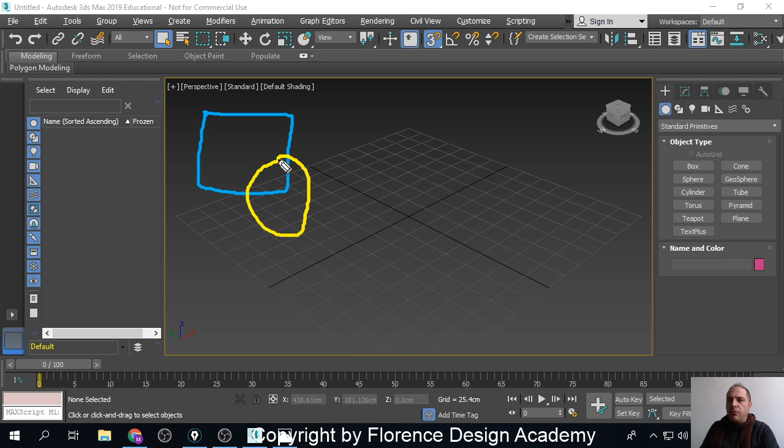And this is intersection. Last but not least, in ProBoolean there is an operation called union. What union means is simply that my solid objects will be combined together like one unique object. So if I start from here, and if I have these... whoa, what a terrible drawing.

So, wait a second. Hello, Marcos. Some of us just started filming, can you please tell what you're working on? First of all, you are late, so there is not my fault. Some are still waiting, and why? I mean, I started streaming a while ago. But what we're viewing today will be, we will see ProBoolean, that is a way to combine solids together.

Then I was saying these, we can make operations, and we've seen subtraction, and there is an operation called union that basically combines objects together.

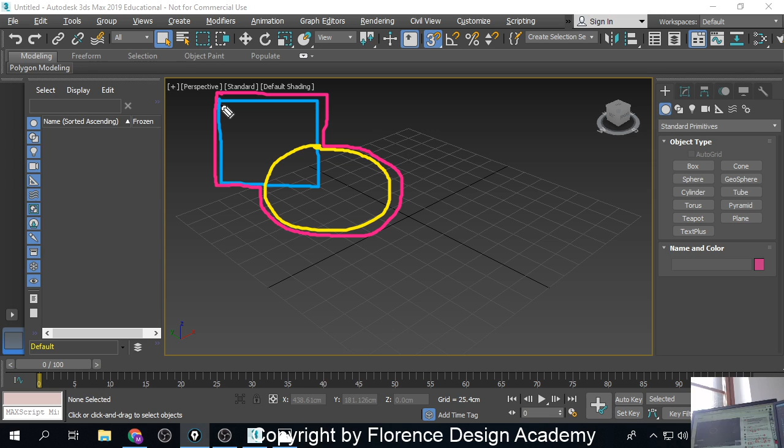Wait. No, we have been sitting in front of the computer for 30 minutes. Just showed up, come on, I don't believe you at all. You know also why? Because while I'm doing the stream, I also have another screen. Nah, he didn't show the link. Nah, come on, I don't trust you. Look, and the reason why I don't trust you, let's see if we can make these in real time, is that I have two monitors, one that shows the actual lesson, and one that shows the stream, so I know when I am online and when I'm not. Let's see if I'm back to the right setting.

Perfect, beautiful. Anyway, we haven't started yet, I was just doing an introduction. We have to see...

ProBoolean. So let's start with 3ds Max now. First of all, ProBoolean is a compound object, so we will find it in the compound objects menu.

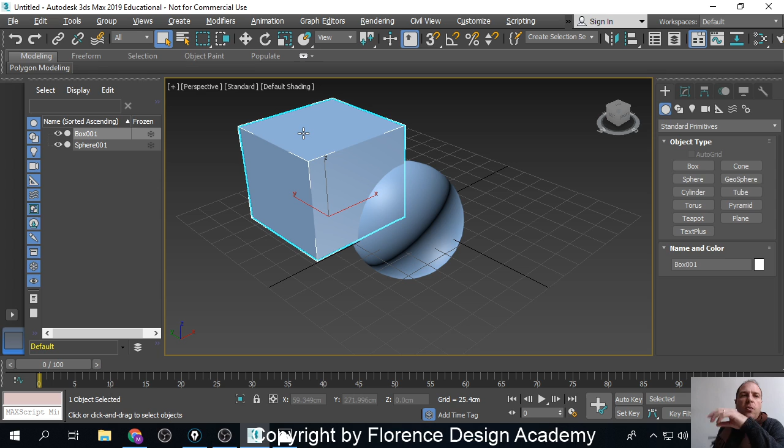So let's start with easy examples. If I create these two objects, what I have to do is set, for me, which is object number 1, and by doing this I will simply select it. With one selected object, I will go to the compound object menu. So I go to create, geometries, then the menu where I find standard primitives, and then I click compound objects.

If I have only one solid selected, I will see a button called ProBoolean. Take care, it is ProBoolean, forget about this one. I click ProBoolean, and inside I need to use a few starting options. By scrolling my menu a little, I see 3 main operations: union, intersection, or subtraction. Subtraction is selected by default whenever you start using 3ds Max, and I will use subtraction at the beginning.

When I want to tell 3ds Max which solid to subtract, I click Start Picking, and then I pick the sphere. When I click onto the sphere, what happens is that I've made my first subtraction. And if I change my point of view, I will notice that I have really removed the volume of the sphere from the volume of the box. This is subtraction.

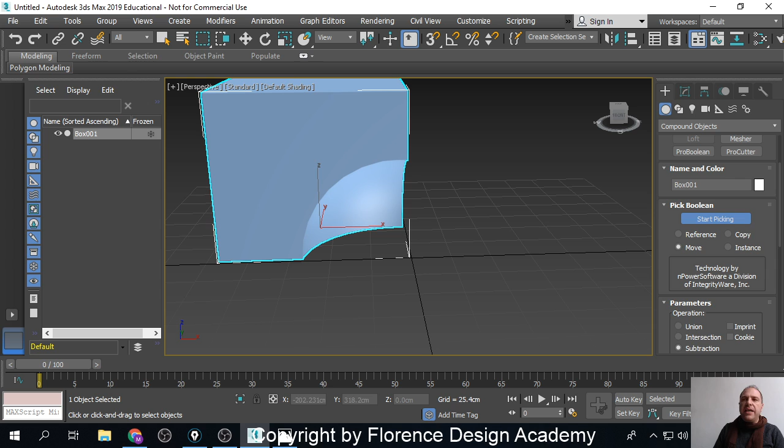Subtraction can be done not only between 2 elements, but if I create more starting elements, I will be able to select my starting object and start removing more elements. Why do you have to know this? Because if you correctly look at the ProBoolean menu, you will see that the Start Picking button is still highlighted in blue. It is active because technically you can select a lot more objects. To show this feature, I will create more objects at the beginning, and let's see what happens.

Look, for example, I will make a weird random example first. Then, using this option where we can subtract more than one element, I will show more realistic examples. But let's start from something random. I make a box, I make more elements, but they are all 3-dimensional elements, stuff like these. It's okay.

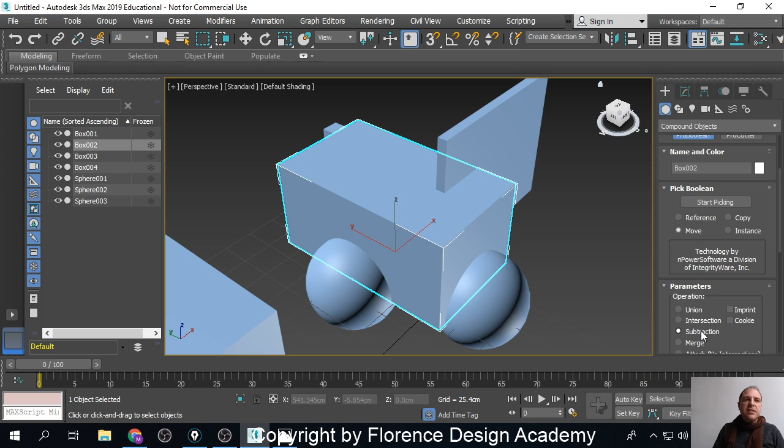So I select that for me this is object number 1, and I want to remove all other solids from this particular one. So what I do is select this box only, then click compound objects, then ProBoolean, scroll down the menu a little, check that the option is correctly set as subtraction, and then I click Start Picking.

Now, one by one, I will click on those solids that I want to remove from the box. So I pick this sphere, I pick this one, then I pick this, and then I keep picking, and then these, and I am basically sculpting my box by removing those shapes that I have created.

I will make other examples, but most important is that when I am done, I need to remember to close the button called Start Picking. If not, 3ds Max will always be in picking elements mode, and I can't even select them all at one time. I have to pick because, more or less at the end of this lesson, I will show you a very complex example. But 3ds Max keeps track of the list of objects we select, and it also keeps track of the order we used in selecting them.

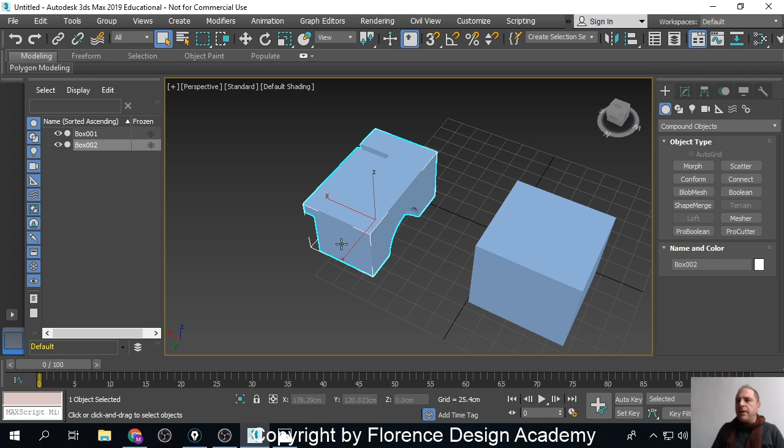That is extremely important. But let's make a few more examples. Example number 1 will be, look, I will make a box.

What happens is one of the surfaces is hollow, it simply doesn't work. It won't correctly make the operation. And we can try, but look, if I make a box that is correct, and by mistake I have these, look, so if I extrude a shape like so, this is something that is wrong, that is hollow, and this is hollow because some of my vertices and edges are overlapping each other.

If I select the box and I go to compound, pro-boolean, subtraction, start picking, and I pick these, this is what happens. It is just wrong, okay?

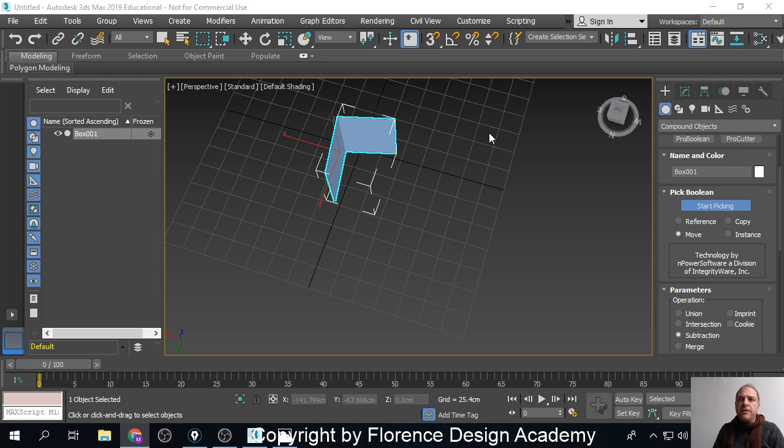Let me check one second. Exactly, no, because for a second the connection was lost. So this is what happens, just wrong, it doesn't work. So they must always be solid objects, and they must be correctly solid objects, correctly done.

So what I was saying is this. Let's see this first simple example. That is, I make a box, then I will do a very basic operation. That is, I use this box, I use rotate, and I make a clone of this object by doing shift and rotating it 90 degrees. And till here, let me tell you, nothing complex, nothing that interesting.

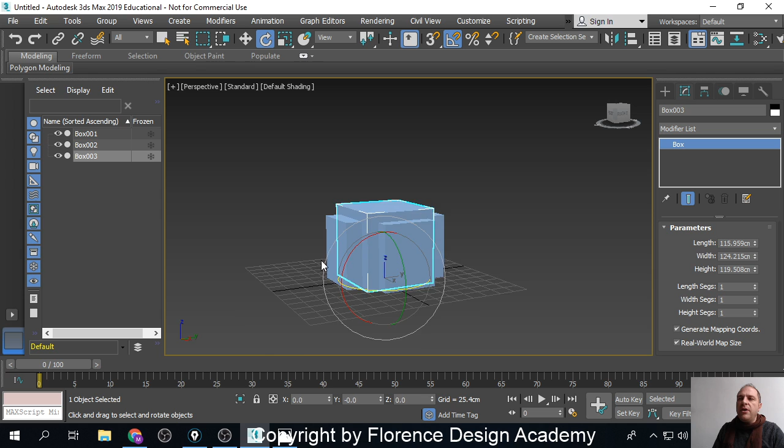What I will do instead now is, I make another box, and I will place this box so that it is a little bit narrower than my other boxes, but it will be a little bit taller than the two boxes that I have created before.

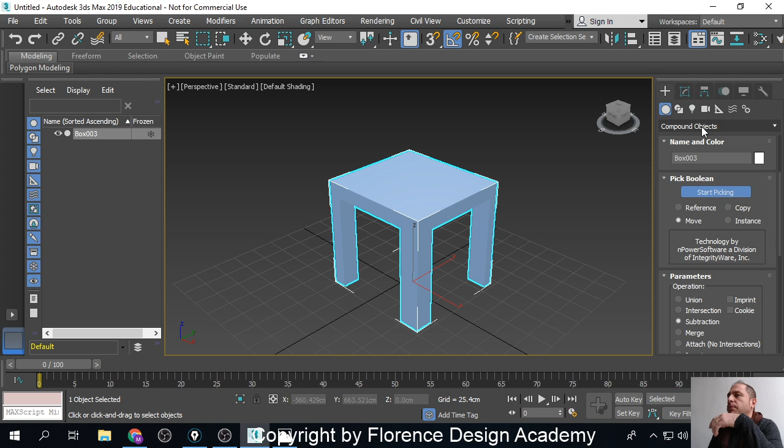Let me show you example number two, just to show you that you can make more than one subtraction. Look, I will make this box and move it a little bit up. But then I will shift and move these up, and I will make, let's say, 3 clones.

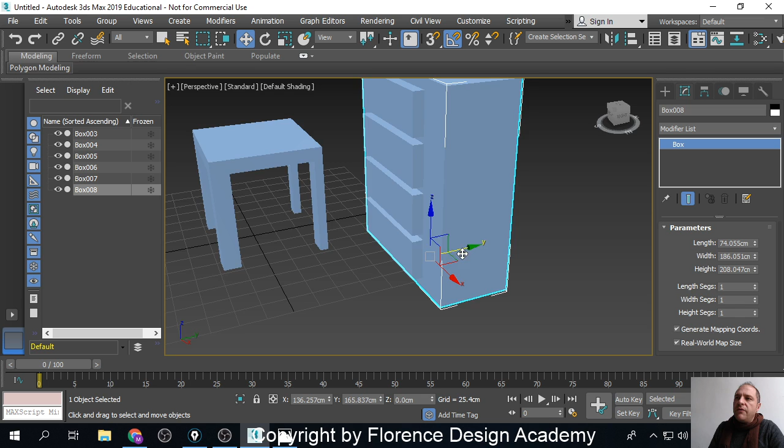Last but not least, I make another box. That will be a little bit larger, but it will be, oops, not down here, it has to go up. So it will be like this. Exactly. And I will move it so that I can see these boxes, and I will adjust it, I will make it narrower.

Perfect. So what I have now is this box, and these 4 boxes that are not, this time, passing all the way through. So what I do is select the bigger box, go to create geometry, compound, ProBoolean, start picking, because I'm using subtraction, and I will subtract 1, 2, 3, 4. I close start picking, and I have made a beautiful bookshelf inside my project.

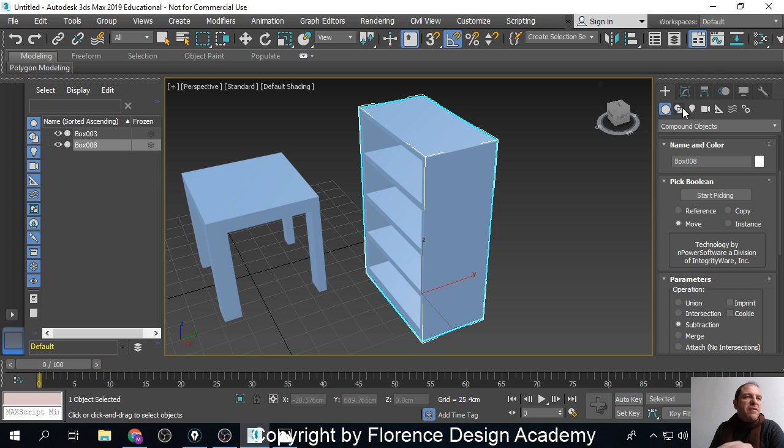But to show you one more example, I want to show you that you are not limited in using only solid objects like boxes, spheres, and so on. Whatever is a closed solid, look.

I will now make a line, and I will be sure that when I close it, this is not only a closed shape, but I have no self-intersecting edges. Everything correctly works. I will try by selecting this shape and extrude it. So let's see, I click extrude, and this works. You can see that the top of my shape is capped, so the solid is a correct solid. I will just make it taller to look like a realistic wall.

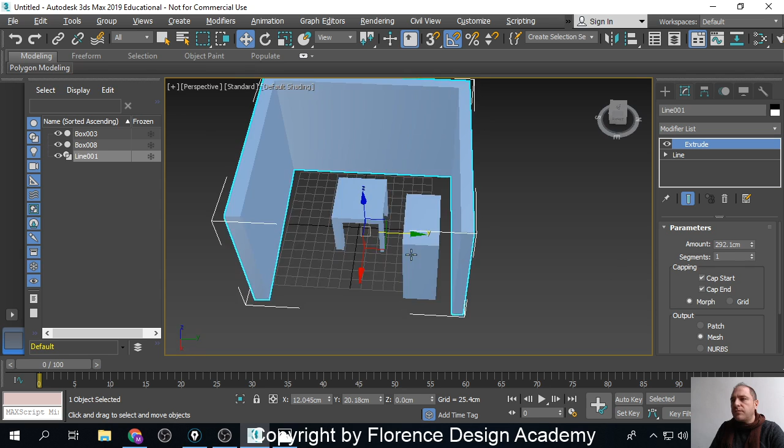Okay? And then, because I don't want just to use a box, that would be too easy, I will do this. Look, I click another line, and I will draw this particular shape. That is line, line, line, line. And then I click line, then I make it angled. Then I move my mouse here, then there. It's not super symmetrical, but it's good enough.

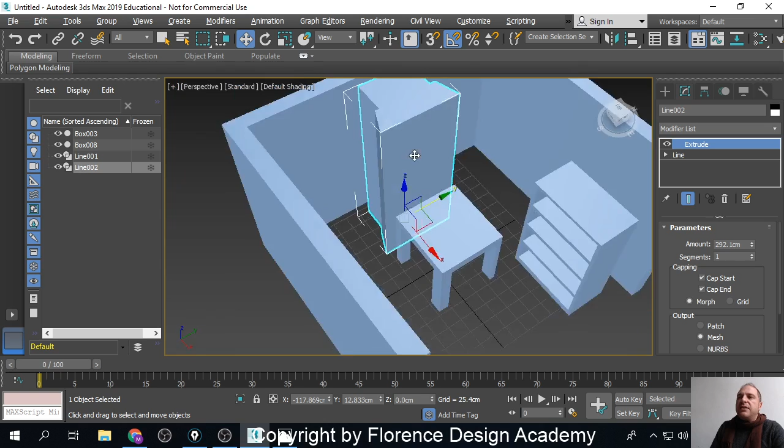What I will do with this line, I will select extrude, so that I turn these into a solid. But I won't extrude it as much as I have extruded the wall. So I will select the amount and make it less. Then I move this object so that it goes through the wall, and I will also move it up a little bit.

What I do now is very simple. I select that the object that I want to keep in my scene is the wall, so I will select this as object number 1. Then I go to create, geometry, compound, ProBoolean. I check that my operation is subtraction. I click start picking, and I pick the solid, that weird solid that I've created before, this one.

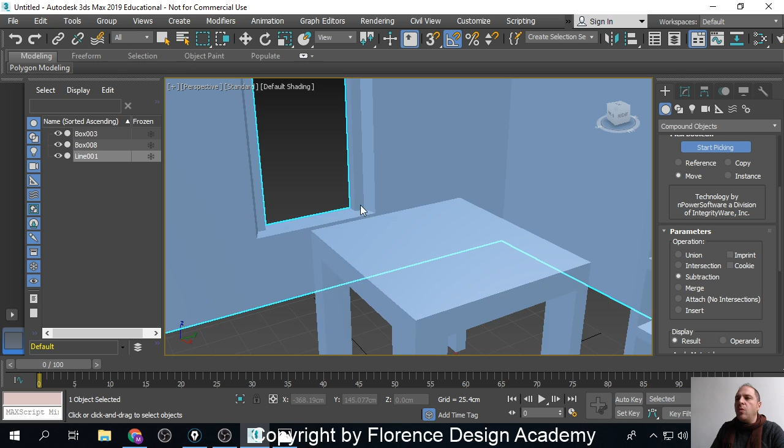Poof! And this is how that solid will cut my phenomenal wall. And you have seen that in this way I have made a window, a realistic window that is not just a square hole passing through the wall, but I also have these small parts of the wall that are slightly angled, and this part is flat, and I have perfectly created the hole for my window.

So that we can see that we can really make a complex combination of surfaces, solid, in order to use ProBoolean. But believe it or not, we are only using subtraction. That is one of the three operations that I want to show you. I want to show you also intersections, and I want to show you union. So let's see these other examples.

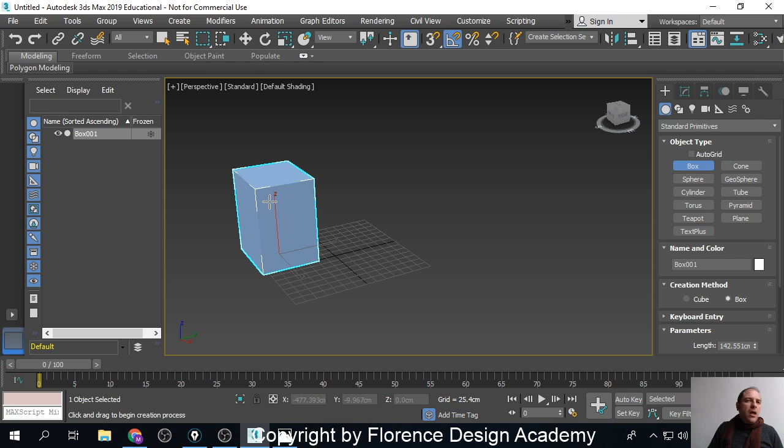So let's delete this masterpiece, and let's see intersection. What is intersection? Let me create this. I make a box, and let's create something different than before. Let's make a, I don't know, a cone. So I make this cone here, and you may notice that the box and the cone have a certain volume in common. So you can notice that the box goes inside the cone, the cone goes inside the box.

What does intersection mean? Intersection works like this. You select again one object only. You go to create, compound, ProBoolean, and before clicking start picking, take care because this is crucial. If we need to change our operation, it must be changed when the start picking button is gray. So I will first click intersection, and then I click the button that is called start picking.

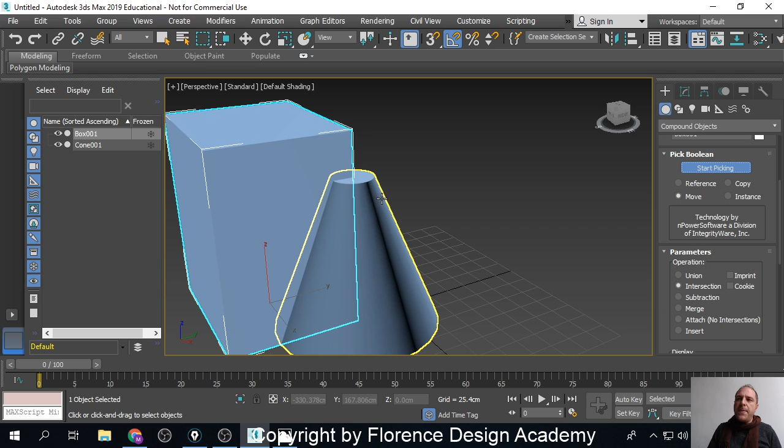With this now, if I click my cone, intersection will do this. 1, 2, 3, boom! This is an intersection. That is basically an operation that is extremely different than subtraction, because instead of removing volume from one object, it keeps only the volume that at the same time was in common between two elements.

This operation here is not that used, is not that common in general, but it is crucial in certain situations. I will show you examples, but the main reason why you should use intersection is if you need to create pieces that you want to join together.

Because see this example, that would be fantastic. This would be too cool to be true. But look, if I make this operation here, look, I start by creating solid objects, and I place my solid objects so that I'm going to make a subtraction. Take care.

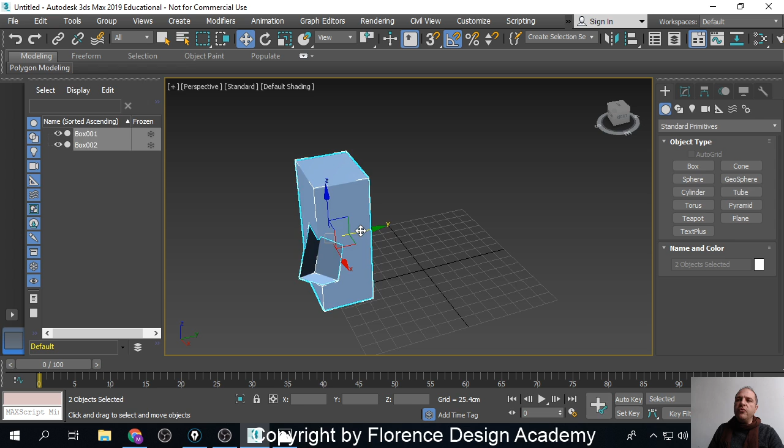Before using ProBoolean in between these two boxes, look what I do. I select both boxes and I use Shift and Move to make a copy of my selection. So, I've made copies so that I can work with them independently without having any issue. So look what I have now. I have these two perfectly similar sets of boxes.

Look what I do now, because this would be shocking. I select one of them, I go to Create, Compound, ProBoolean, and for example, I keep these as intersection. I click Start Picking and I pick this box. This weird thing that remains, believe it or not, is the volume that at the same time is inside my taller box and inside the angled one.

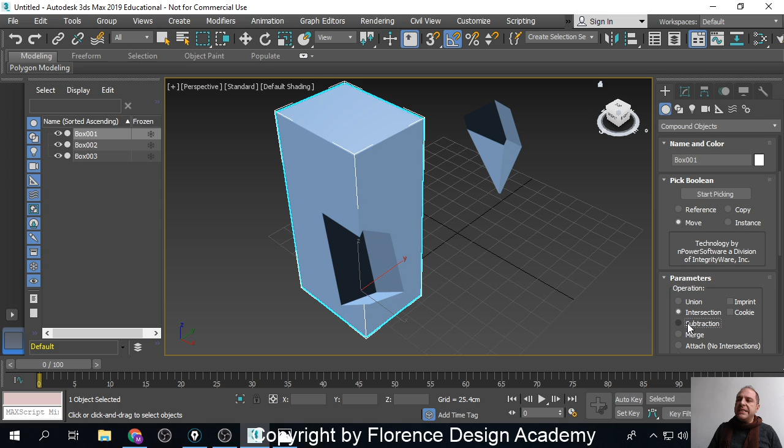What I will do here, in my second set of solids, is select the box, go to Compound, ProBoolean, and before clicking Start Picking, I make a subtraction. I click Start Picking now and I pick this. So I create, and then I close it, and I create the hole inside the box.

So what is the link between subtraction and intersection? The link is that in this way, by using two twin sets of objects, one with intersection, one with subtraction, believe it or not, I have made a piece, this fragment, let's say, that will perfectly match this hole like this. It matches so well that it becomes even hard to be seen.

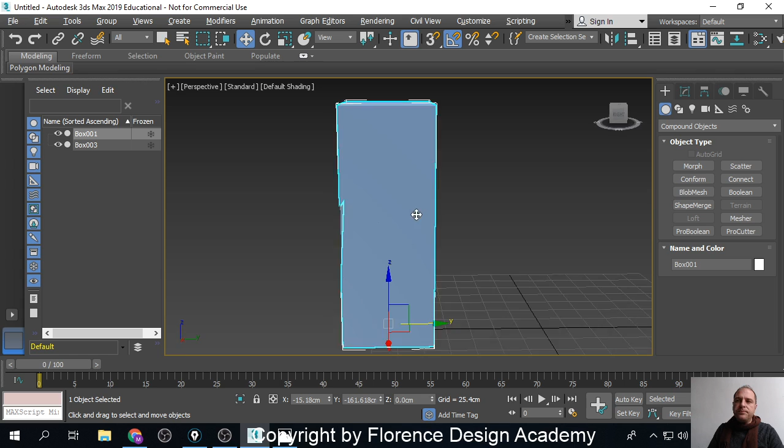Don't mind it, even if I haven't explained it, I just changed the color to see it better. But look, now we have this piece that matches this gap. Fantastic.

Let me show you now union. This is the last operation that you need to know. Union is pretty similar to group, but union as ProBoolean is a geometric operation. Why did I say the word group? Because it is very important: ProBoolean works with solid objects. It doesn't work with anything else, and a group for 3ds Max is another object. So if you have a group of elements, ProBoolean won't work with them.

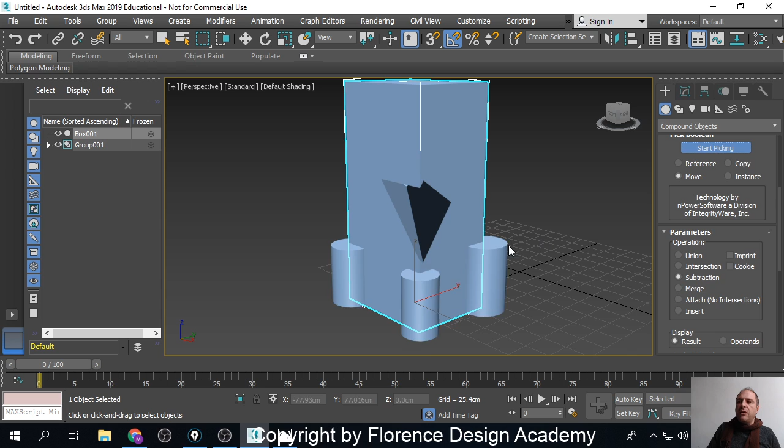So look, let's say you have these cylinders, and you select your cylinders, but you group them before. If you select this, make a ProBoolean, subtraction, start picking, and select these, they will work when you subtract them, and this works only because it was a group of 3 solids. But it won't work if you select the group first and then want to cut something from the group, unfortunately. So sometimes we need to pay attention.

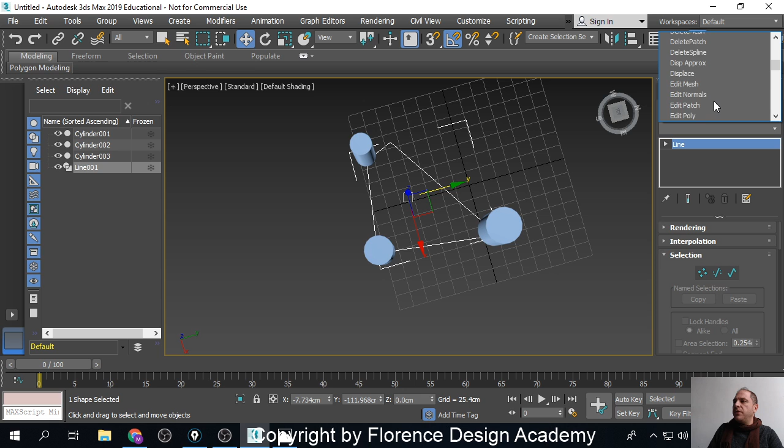For this reason, inside ProBoolean there is another operation called union. So if we want to do the opposite, imagine we want to have those 3 cylinders, and let's say make a line like this. Exactly. And I extrude this line. Where is extrude? Here. Perfect. If I want to keep my cylinders, but cut them so that inside they will have these angled missing parts, I have to do union before.

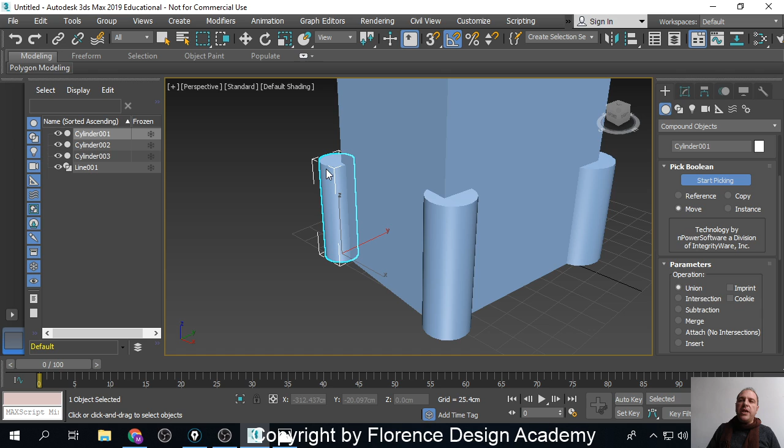That works like this. Again, I select one object, and look also at what happens inside my Scene Explorer when I make union. By selecting one object, I go to Compound, ProBoolean, I change the operation before. So first I click union, then I click Start Picking, and I make a union between this cylinder and this one. In this way, they are attached together, so they become one object,

not like a group. Making a union, do you remember in editable splines we've seen attach? Exactly. This is like attaching splines and not grouping them together. So now they have become one solid only. And you can also notice that my two additional cylinders are gone from my menu because they have been fused together with the first selection.

But now, if I want to make a subtraction, I simply close Start Picking, because I need to change the operation. So I close Start Picking, I change the operation to subtraction, and then I click Start Picking again and I pick the box or whatever it is, and boom! Because I have joined these cylinders first and then removed that shape, my shape is removed from all three cylinders together. Okay?

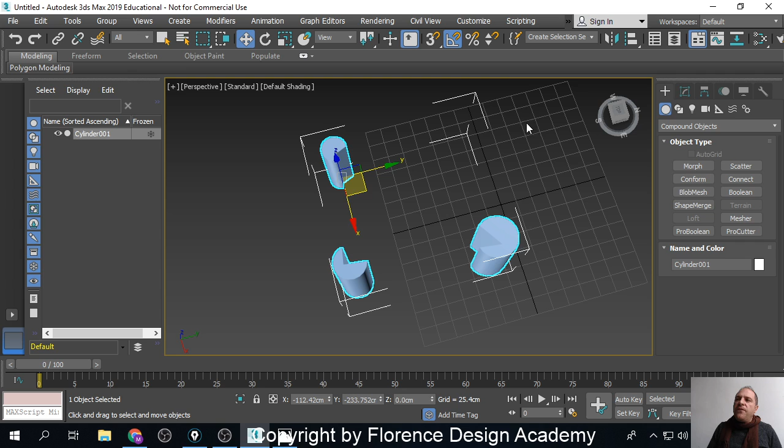So let's move on. I want to show you that inside the same ProBoolean you can combine more than one operation. And you are not forced to create all of your solid objects from the beginning. If you want, you can make a few objects, then ProBoolean, then create other objects, then ProBoolean, and so on.

This happens simply by selecting your ProBoolean object and going into the Modify tab after your ProBoolean has been created. First, I will show you a random selection of objects. But using the same exact technique, I will show you that you can create more realistic objects by combining more than one operation. So let me show you example number one, the random one.

Look, I can start by making this box, maybe. Then I will make a bunch of other boxes. Perfect. Then I make cylinders, one here, one there, one here, and I will rotate these so that they intersect all my boxes.

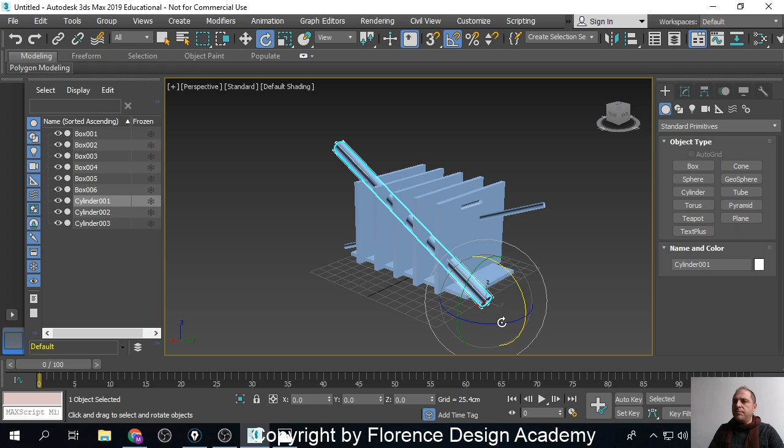Like these, like that. I mean, this I don't like. And then this one. Okay. So what I have to do now is this. I want to make join first. Then I will make subtract. But then I will do another shape, and then I will do intersection.

So, look here. I select one starting box. I go to create, compound, ProBoolean. Then I click start picking. Sorry. Then I check that I want to make union first. This is extremely important. Then I click start picking and I pick these, then these, then these, and that. So all my boxes have been joined together and now they act like one solid only.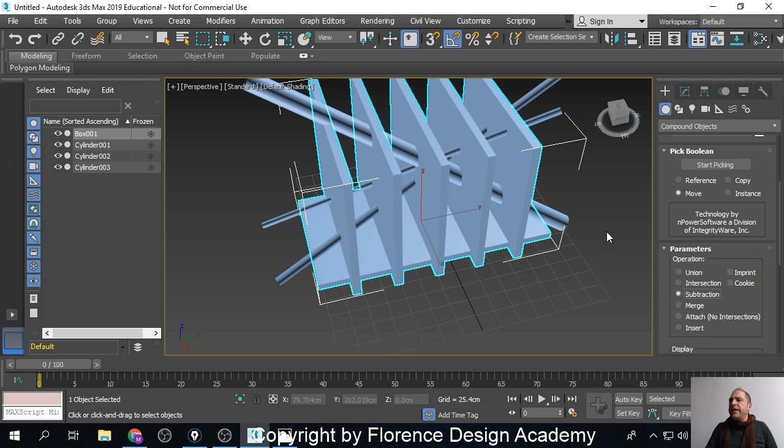But now, see this, how can I change my operation? In order to change the operation to subtraction and to be effectively working, what I have to do is, I have to turn off start picking. This is extremely important. Then I click subtraction. And then I click start picking again.

With my subtraction and my start picking button selected, I will pick these cylinders. And because I have already joined all my boxes before, by removing those cylinders, I remove cylinders from all of my joined boxes.

What I want to do now? Now I want to do an intersection, but there is nothing that I can intersect right now, so I have to add one more shape. So I will create whatever shape. Let me just make a sphere. Yes, like these. And I will move the sphere up. I will scale it a little bit also. Okay?

And what I will do now will be this. Look, I select what is already a ProBoolean because this object has been already created with ProBoolean. So I select it. I go into the Modify tab and I can see that this is still a ProBoolean. So now the only thing that I do is I change the operation to intersection.

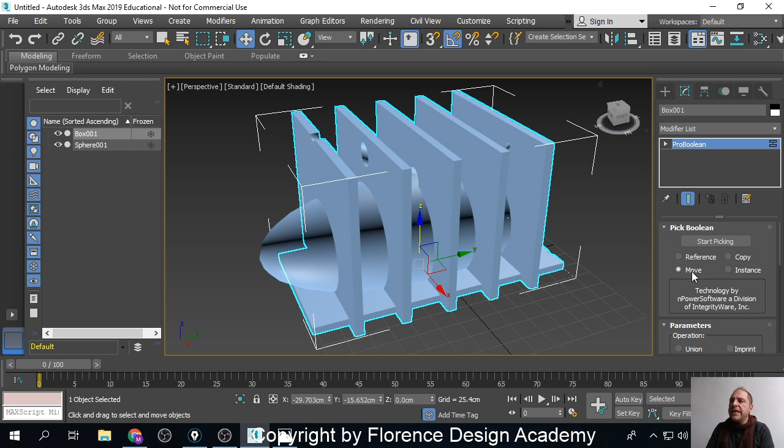I click start picking and I pick the sphere. So what remains will be only the volume that at the same time is inside the sphere and inside my ProBoolean. So it will remain this. Fantastic, isn't it?

Now, let me see if I can show you a realistic piece of furniture, there is actually something that you can easily model with this technique. I just need to remember the name of this object. Give me 3 seconds.

What you have to do is only you make one starting box. Then you shift and move it. We can make several instances. They are too thin, in my opinion. Exactly. Let's make them thicker. You make several instances. Then you select them all.

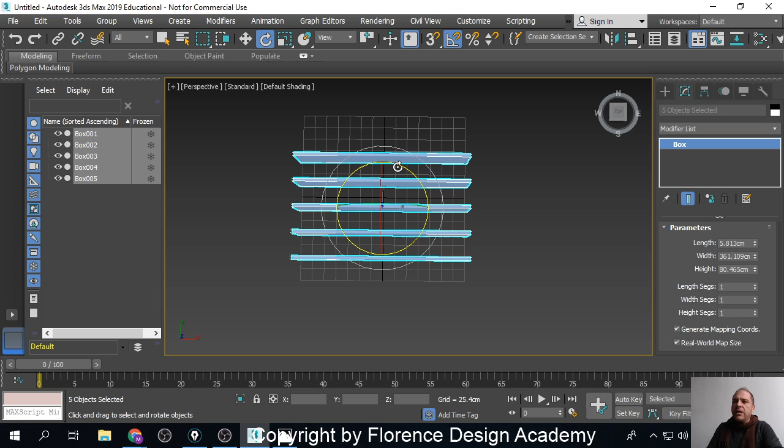You click rotate, and what you have to do is you shift and rotate them together 90 degrees. So I'm also using angle snap. You left click, but you are also pressing shift, so you shift and rotate, and you make these duplicates. Okay? Check this, because this would be unbelievable.

What you have to do now is you have to first, using all those boxes, use union. So I select one of them, and just because I'm picky, I select the center one. I click compound, ProBoolean, union, and you have to change the operation before clicking start picking. Now I click it, and I will pick all other boxes. And then I close start picking.

In this way, what I obtain is that this acts like one solid object. And you can also notice that even in my Scene Explorer here, all other boxes are gone because they have been fused together in this single object.

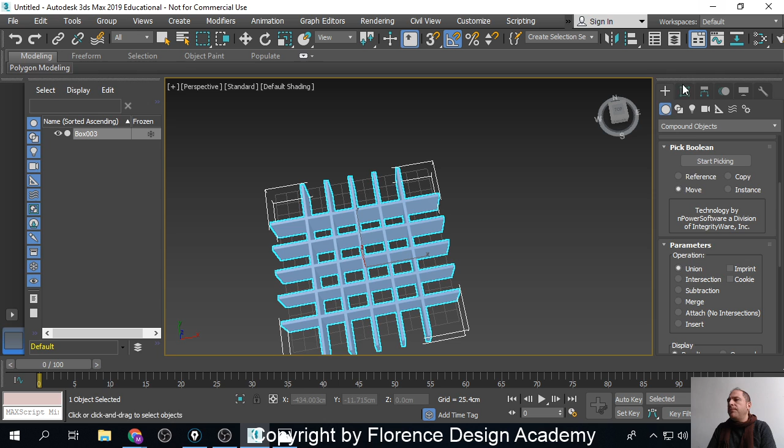I have almost done. What I will do is I make a sphere. But I want to be at least a little bit more precise. I would like to place the sphere into the center of this box. And you may notice that by selecting the center box as starting object, the pivot of my ProBoolean is also in the center.

So I use snap to the pivot and snap to the pivot only, and I move the sphere from its pivot to the pivot of the box, of this object.

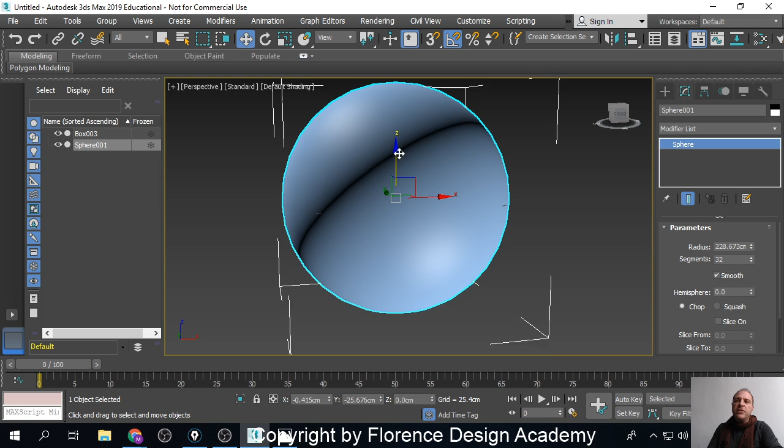Okay? Ready for this? Look, I change the radius of the sphere, but I also, without any snap, I just move the sphere down so that it is still into the center, but has been moved below on its vertical axis, and maybe I can make it bigger, exactly like that.

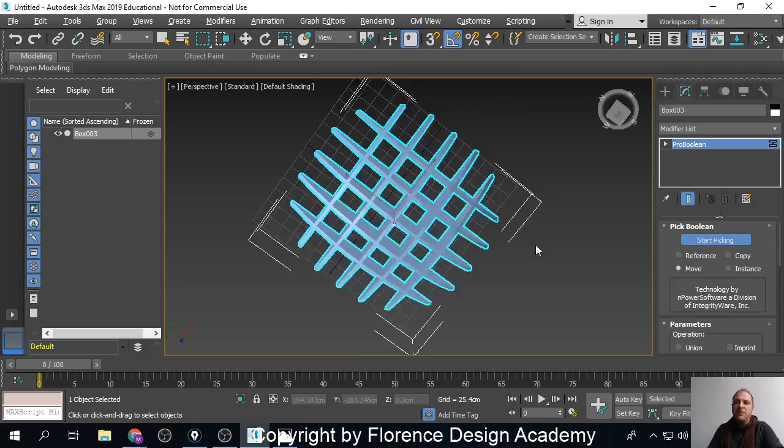Ready for this? If I use now the ProBoolean, but this time I use intersection, so I go to the Modify tab, I change first operation to intersection, I click Start Picking, and I pick the sphere, and what remains will be this. Ready, steady, go. Boom! Fantastic. Look at that. Unbelievable, isn't it? I know.

And by using very simple steps, you have created that particular shape that we were trying to do. There is this bookshelf here. Okay? If we add also a box behind, that will be like a circular shape. Or we can add it as a cylinder, that would be exactly the same.

By combining shapes, I want to make a last example that is again even more complex than this, but it shows you that in 3ds Max we are not limited to making boxes, spheres, cones and stuff like this. We can really create extremely complex objects, and we are just scratching the surface. So again, let me see if I find something that I can use as a reference. I need a picture.

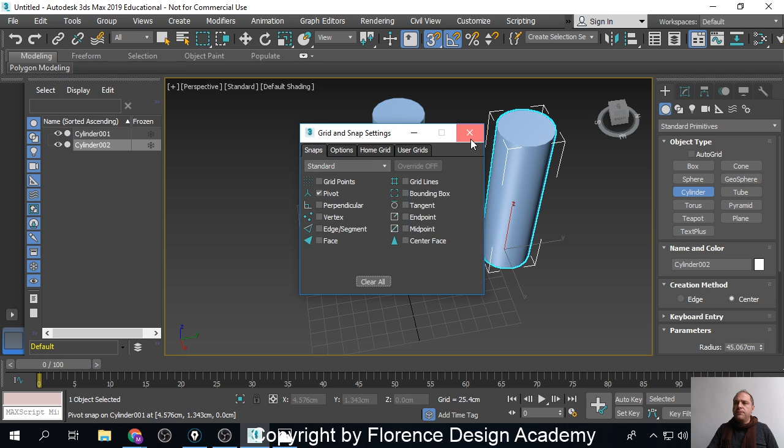Then I move cylinder number 2 from its pivot into cylinder number 1. Oops, sorry. Like this. In this way, my two cylinders are perfectly aligned. They are concentric, to be more precise. And what I will do next is I will turn off the snap, and I will simply move this cylinder a little bit up, like this.

Not done yet. What I have to do is I have to select both elements, and I will rotate these two elements together. I rotate them so that they will be horizontal. So I rotate them 90 degrees. And again, till here, nothing that is out of this planet.

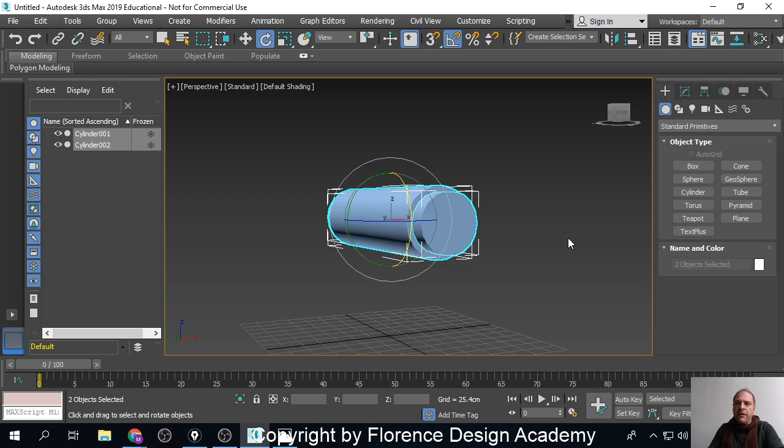But what I will do now is I will select again both cylinders, and I shift and rotate 90 degrees, so that in this way I obtain the shape of 4 crossing cylinders. Okay? Believe it or not, we are almost done. We need to fix a couple of things.

I now have to use ProBoolean, and I will start by selecting this cylinder, that is one of the two outer cylinders. What I will do is I will simply click Compound, ProBoolean. I check the operation, that must be union first. So I click Start Picking, and I join this outer cylinder with this second outer cylinder, like this. Okay?

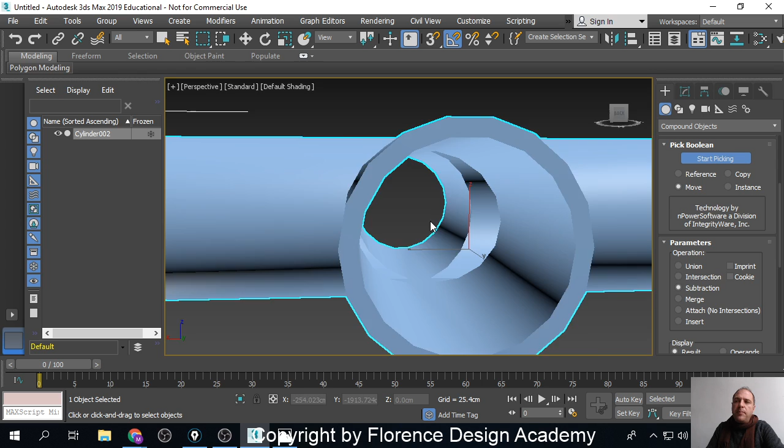Then I have to click Start Picking because I have to close it. And this is why: because now I need to make subtraction. So I close Start Picking, I click subtraction, I click again Start Picking, so that I subtract this longer cylinder and this longer cylinder. And what I get right now will be this. It will be basically like a pipe that is cut inside. Okay?

Now, Michelle, it is possible to make this with tubes. If you make tubes, and I will show you after this example, believe it or not, you must follow a completely different path. Because if you make tubes at the beginning, what happens? If you make these as tubes, when you remove one of these cylinders, it won't cut all the way through the two tubes together. So you can use tubes, but I will show you by following a completely different path. So just stay with me one second.

But look, the last step that I have to do here is I need to make a box, and I need to place this box where I want the vault to be. So let's say I will move it here. Okay? I can then, if I want, make the box smaller or bigger, doesn't matter.

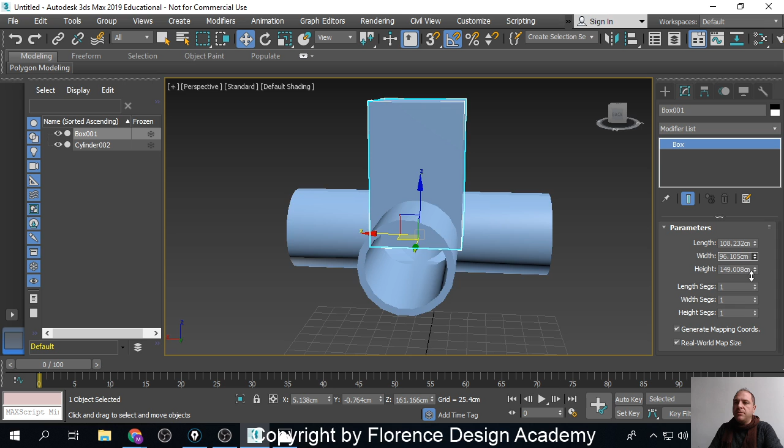But to finish this, I will select my ProBoolean, change the operation to intersection, and then start picking the box, and this is the part of my cross-shaped thing that will remain. Poof! This is one way to make cross vaults by using union, subtraction, intersection.

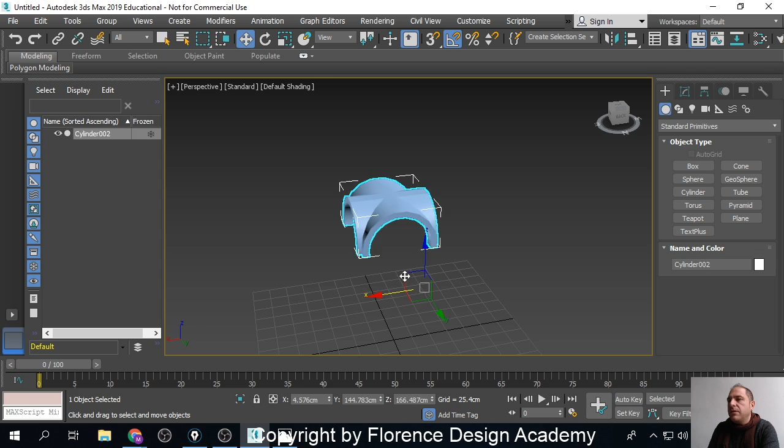One of your classmates asked if it is possible to do this with tubes, and the answer is yes, but believe it or not, we must follow a completely different path in order to make this happen. It is basically something that involves making a tube, making a box, but a very specific box, and see this. Look, we can make a tube, then I will make the tube horizontal, so I rotate it 90 degrees.

Now what we have to do is this. We need to make a box, but this box can't be just a random box. This box must be a cube, so it has to be that length, let's say 120, and the width must be exactly the same. Height is not mandatory, but it's just better. And then check this, because this would be phenomenal. We must rotate our cube exactly 45 degrees, not less, not more. It has to be 45.

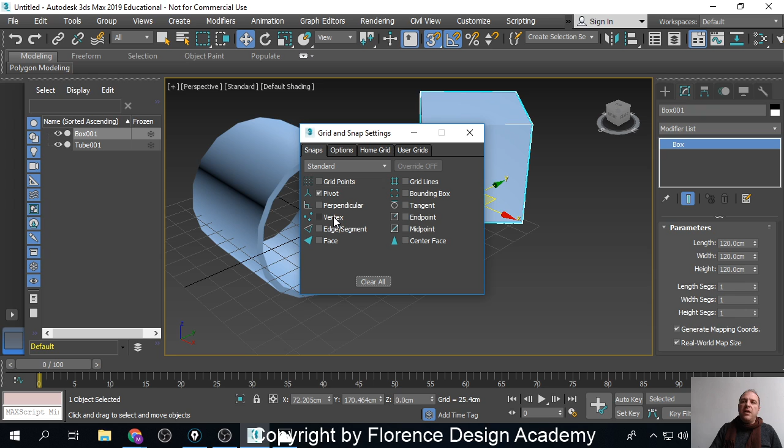And then, again, because if not, life would be too easy, we need to move this box so that this box perfectly has its center matching the pivot of the tube. So I need to right click, selecting pivot and vertex, because I want to move this box from this vertex to the pivot point of the tube. So this is our starting configuration. Okay? And I mean, it was not that easy.

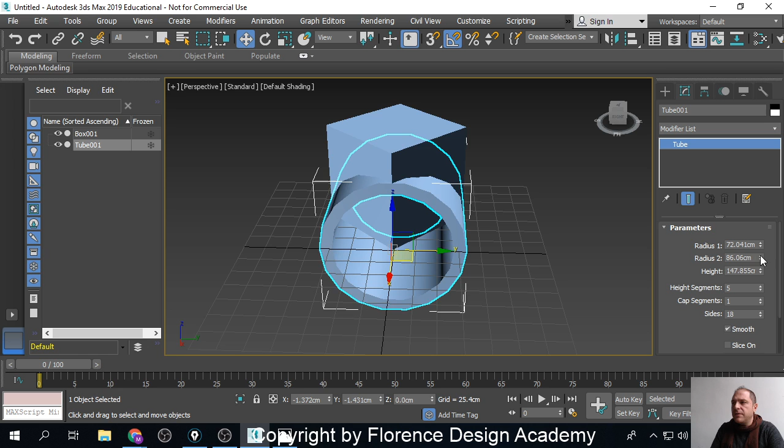Once we are here, we need to make a very simple operation. That is, we need to do one starting ProBoolean that is intersection. But before doing this, let me make the tube a little bit smaller. Exactly, like this. Perfect. And maybe I want to make it rounded because it has not enough sides. So it's just prettier. Okay? So what I have to do is this.

I select the tube. Operation number one is I have to make Compound, ProBoolean, intersection, start picking, and pick the box. And what remains is this part of the tube. I need to use only, let me highlight it, I need to use only this part of my tube, and I need to cut this one.

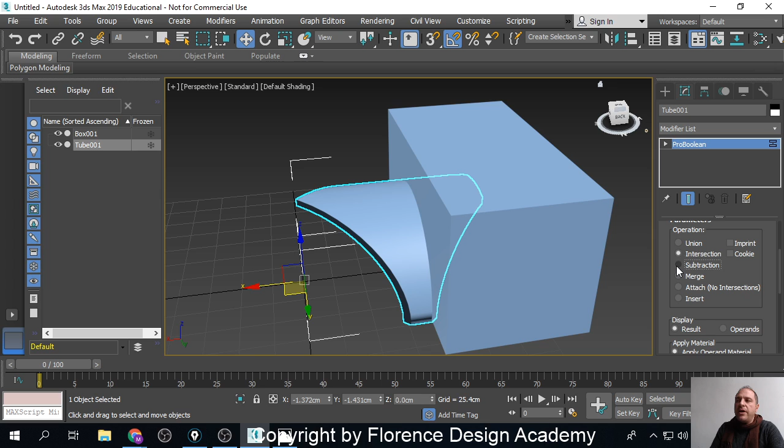So what I will do is I make another box, and I will select this ProBoolean, go to the modify tab, change the operation to subtraction, click start picking, and pick this. Fantastic. We have almost done. We can see that we are lucky enough that the pivot point matches this position of the tube. If not, let's move it. We will move the pivot here.

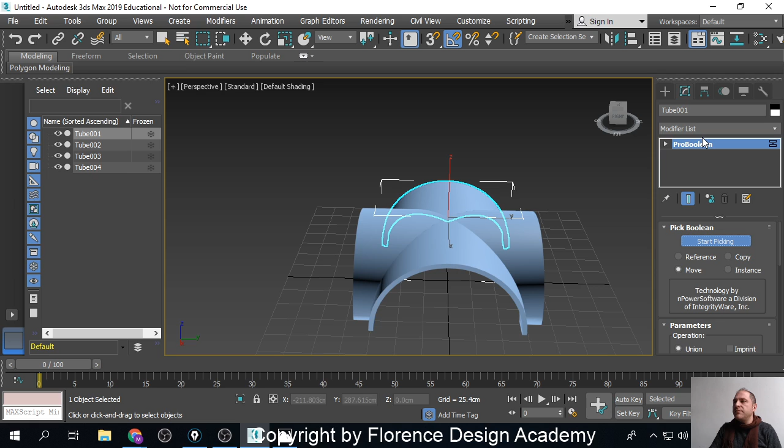And this is crucial because now, in order to make my cross vault, I have to select, rotate, shift, and rotate this 90 degrees. And I make 3 duplicates. I haven't done yet. Now I click start picking, union, start picking, and I combine, start picking. I've made instances. No, what a shame. Sorry.

I make shift and rotate 90 degrees, but I make copies because if not I can't join them, and then I make union, start picking, and I pick them so that now they are one solid object. And as you can see, at the end, starting from a completely different point of view, that is, instead of cylinders I was using a tube, at the end, no matter what, I have used union, subtraction, intersection. So I use all 3 available operations together to make this complex object.

And let me finish with one last example for ProBoolean. Then, as I said at the beginning, for today you have no homework, so that next week I will give you a slightly more interesting, read between the lines, complex homework. So let me show you the last thing. There is this.

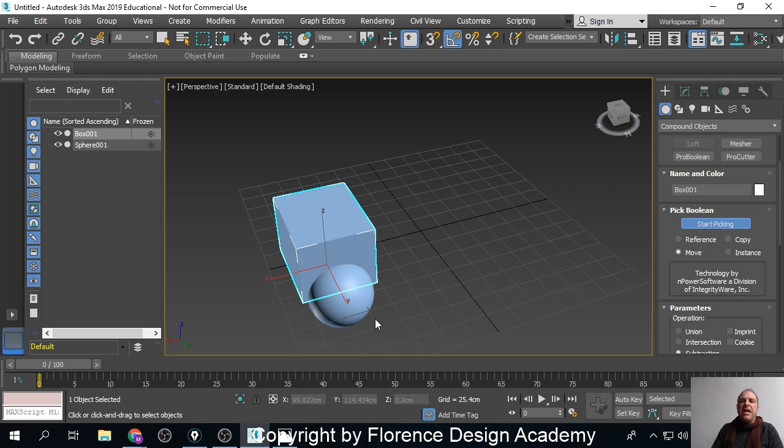Let's make it simple first. If I select the box and go to Compound, ProBoolean, and make a subtraction, then click Start Picking and pick the sphere, you will see that the sphere is gone. What I see is simply the trace left from my sphere because it is carving my box. But remember, box was selection number 1 and sphere was my second selection.

If I go to the Modify tab with my ProBoolean object selected, next to the ProBoolean word there is a small triangle. You should click it, and by clicking it, you will discover there is something called operands down here. What are operands? Operands are basically the box and the sphere.

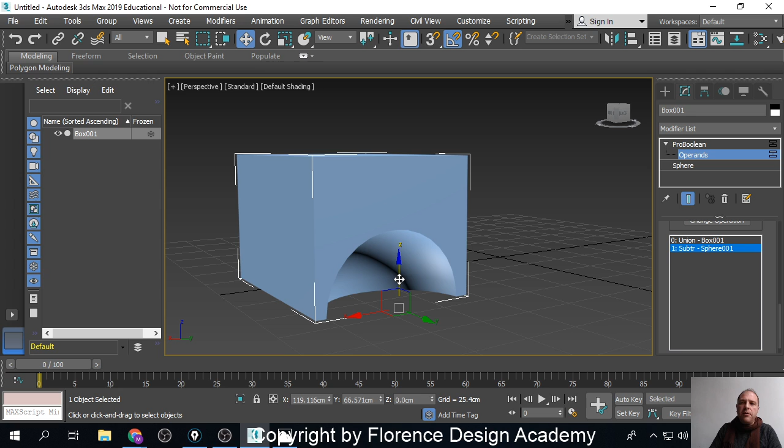Now you will see that if I click Move and I have selected my sphere, I won't move the entire ProBoolean, but I will move the sphere only. And because my sphere is set as subtraction, no matter where I move it, it will be subtracted from the box.

So if you are not sure if the placement of your objects is correct from the beginning, this is not a limit in using ProBoolean, because this can be adjusted as many times as you want. I can scale the sphere, I can move it, I can also move it away, and if my sphere doesn't touch the box it will look like it is not cut. But then I will move the sphere and I will see the trace left by the sphere when it is subtracted from the box.

Can you also duplicate if you shift and move? Of course, yes. Because whenever you can move, you can also shift and move. So you can also select with control - you can select two elements now, and have these as final editing.

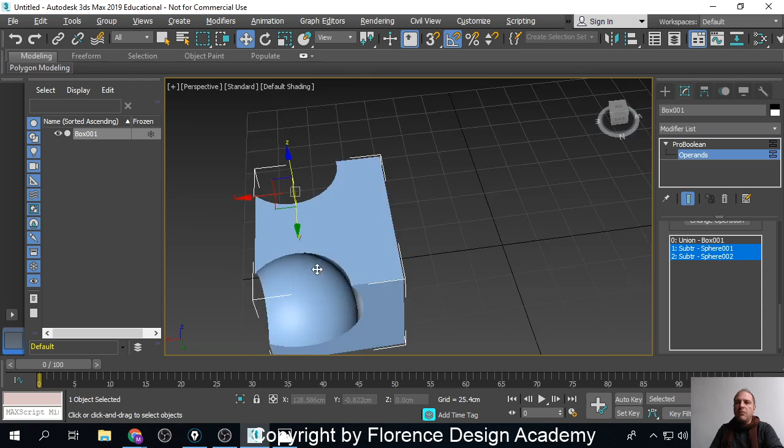Let me show you a last example for today that involves editing elements after being inside a ProBoolean, and this will just shock you because it will be too cool to be true. So look here.

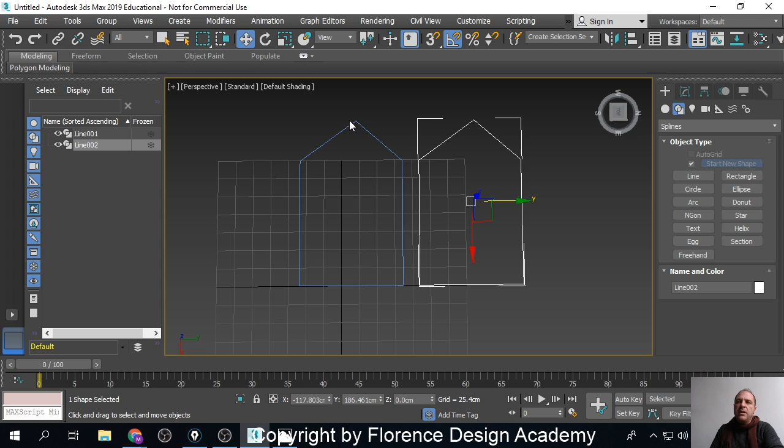First of all, I will create this shape. I make a line. I am repeating this but with another example, because otherwise it would be too boring. So look, I make one line, then I copy it, and into my copy I use spline with Outline. Then I make another line, then another line.

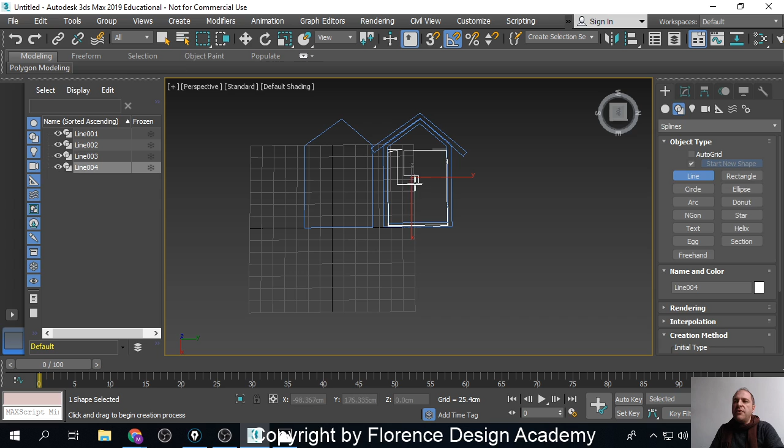It's not that perfect, but it is fine. No, I don't like it - I want this to be here. Then I make another line, and I will do it like this. Okay, so now look at all these elements, and now I make even a box. I have a lot of things here, and what I will do is this.

I will start by extruding all these shapes with a very small extrude amount, like these. Then I select this one and extrude it again, then I select this one and extrude it, and then extrude this one as well. You can see that all these shapes are correctly created as solid objects. At the very beginning, they don't make that much sense, but they will be unbelievable in a second.

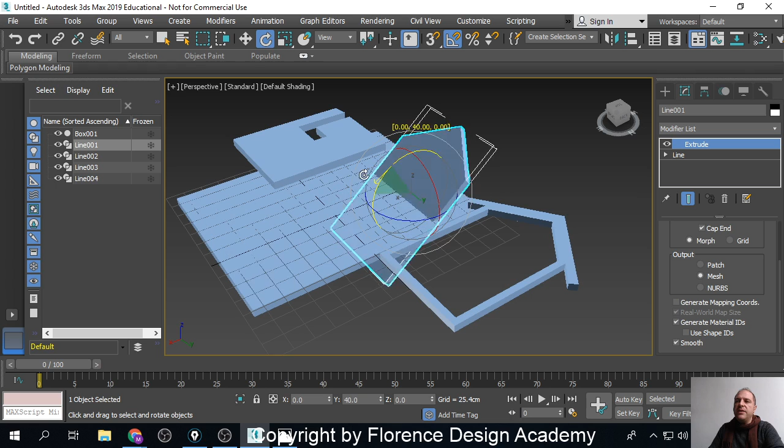Because look, I will move this piece up here. I will rotate these to be vertical, and I will rotate these to be vertical as well. I need simply to place them in a more precise way, so I will use snap to the vertex so that these will go here.

No, it's this one. Exactly. And then I will move all of these things up. I will move this piece here. Perfect.

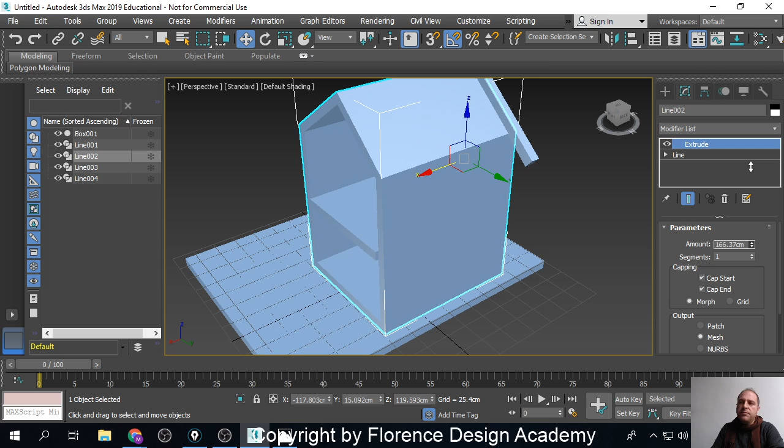Because I've made all these pieces as separate elements, I can keep extruding these, and I can also shift and move to make a duplicate of this. So believe it or not, I've made a small house just by extruding certain elements. This I just move to the center because it's better.

But now, see this. If I join with ProBoolean all these elements, I will get a house that at the end will have no doors, no windows. So let's start doing this.

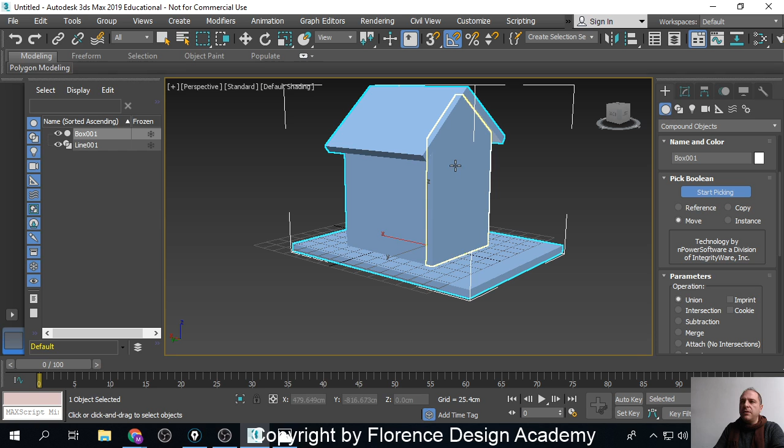Look, so I select my box, click Compound, ProBoolean, I make union, and I use start picking to join all these solid objects together. I can see no additional objects on the left of my screen, so it means I've joined all possible elements, and I close start picking.

So now I create at least another box in here, but I also create a very long box here, maybe not that tall. Exactly. I move these up, and I shift and move a copy up as well.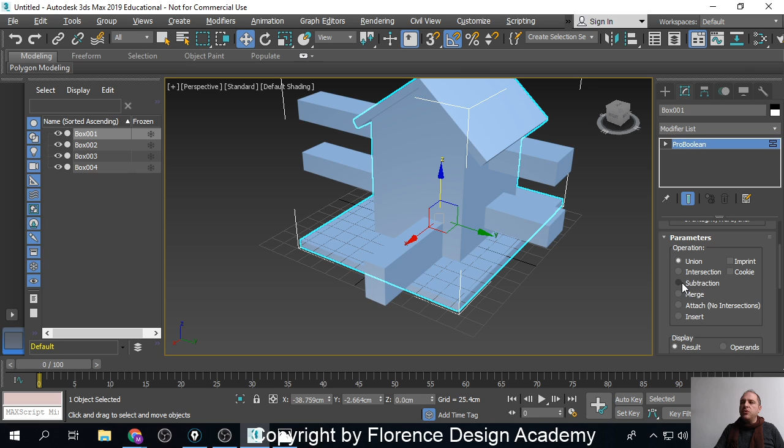So now I select my ProBoolean, I go to the Modify tab, but now I first change my operation to subtraction, start picking, and I pick these, and that, and I have opened basically my windows and my doors into the house that I have created before.

Okay, but now let's see a couple of problems, because if you pay attention, you may notice that my box was the exterior, but my house already had an extruded floor, so I can see now that the position of the door is slightly wrong.

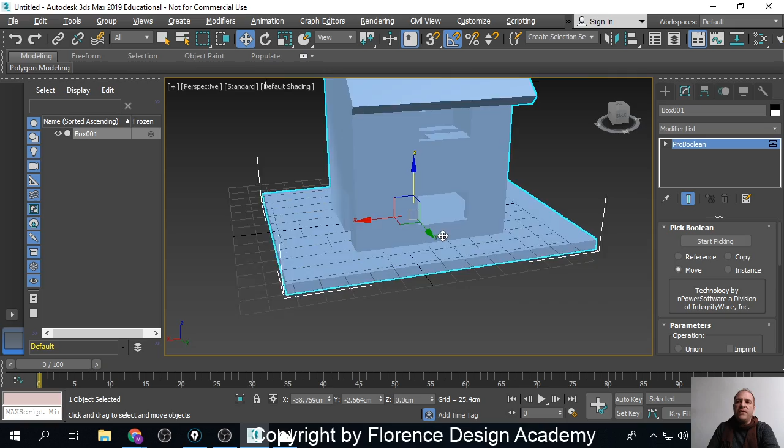And as I said at the beginning, I can't be sure that all my objects are correctly placed from the beginning when I use ProBoolean. So look what I have to do. I need to go to the Modify tab, and I need to move elements inside my ProBoolean afterwards. And I will do this.

Next to ProBoolean, I click this arrow, I select operands, and I scroll my menu so that I see all objects I've used to create my house. I can see that I started from a box joined with an extruded line, another extruded line, joined, and next to each object I can read union.

So when I selected that, I opened doors and windows when I clicked subtraction, but if I click this subtraction, I can see that the pivot goes up here. So this is the box that I've used to cut these windows.

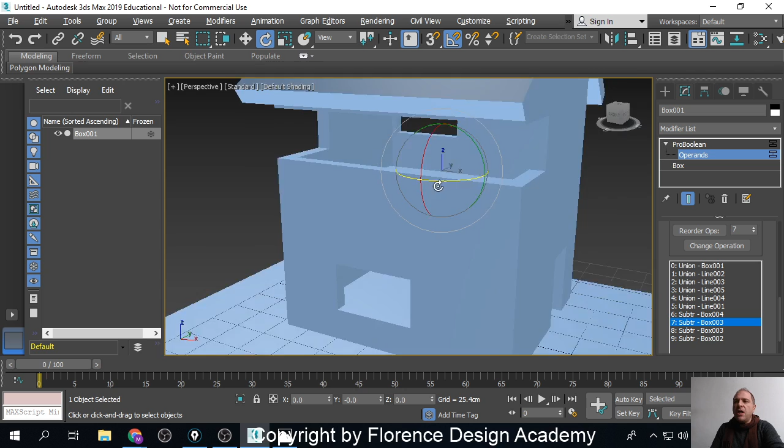And maybe I can select it because maybe I want to move it up. Or, like your classmate said, I can move this here, but I can also shift and move it to make a duplicate of this box. But maybe I can also rotate it 90 degrees so that I move it and make windows in this other wall.

Then I select the previous one and I move it here. If I select this instead, it's the box I've used to cut windows of my ground floor. So I will just move them a little bit up.

And the last box, called box number 2, that has the pivot in here, shows me that this is the one I've used for the door. So I will just move it up, and maybe move it a little bit away so that in one operation only I create the door and a step that allows me to enter inside the house.

So by clicking operands and selecting them from the ProBoolean menu, I am able to modify. For example, I can scale it down or scale it up. So I can still modify objects that have been placed inside a ProBoolean compound object.

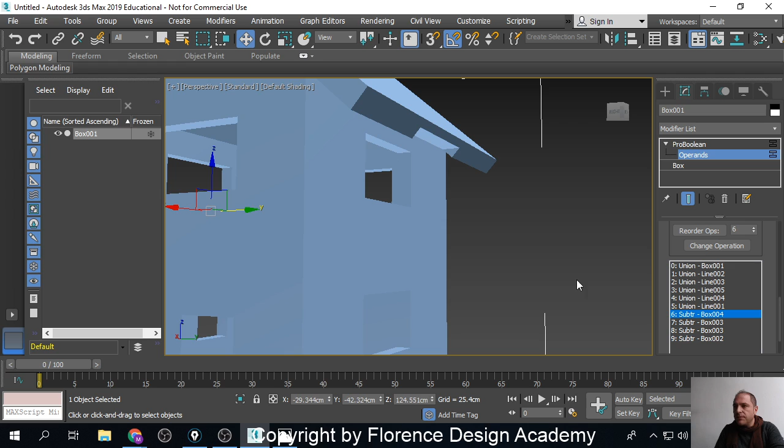Exactly. Why this is extremely useful, especially in this situation where I've made a house: look at this weird box that I will add now. I will create, at the end of the entire modeling path, a super big box that is larger, taller, and longer than the entire 3D model of my house. What I will do is start by placing this box in a position that is not even touching the entire house, okay?

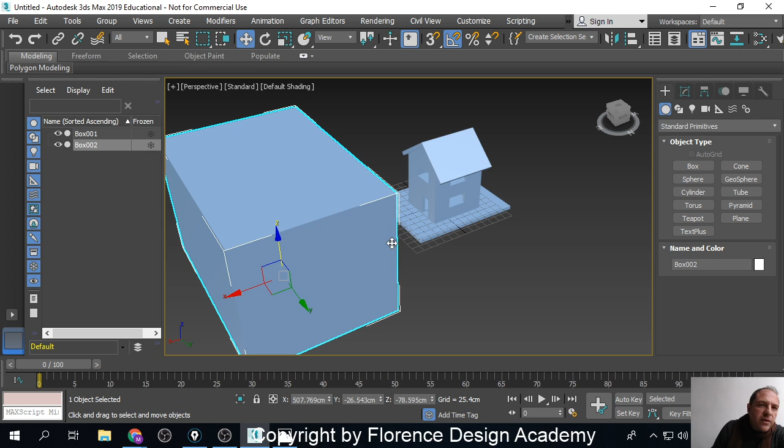So, wait a second, I had an issue with loft in last homework. Can you please help? How?

So, let me finish this first. Look: I select the house, I go to my ProBoolean, I select subtraction, and then I click start picking, and I pick this box.

If you notice, because the box wasn't touching the house, the box looks like it is gone. But check this: I open ProBoolean, click operands, and if I look into my operands, the last one in order is also the last big box I created. There is a subtraction, but it's not cutting anything because its geometry wasn't cutting my house.

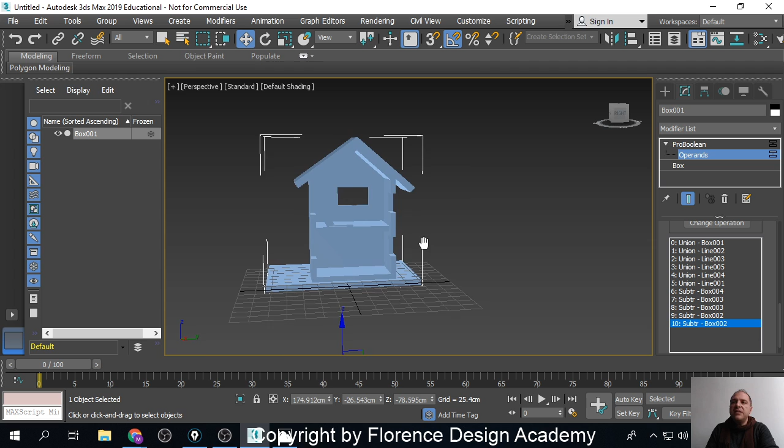But see what happens if I now move this subtracting box to my house. When this box cuts the house, I will have a section. If I keep moving the box, I will have another section on the opposite side. If I move the box in front here, I will get this section, or if I move this box on the opposite side, this section here.

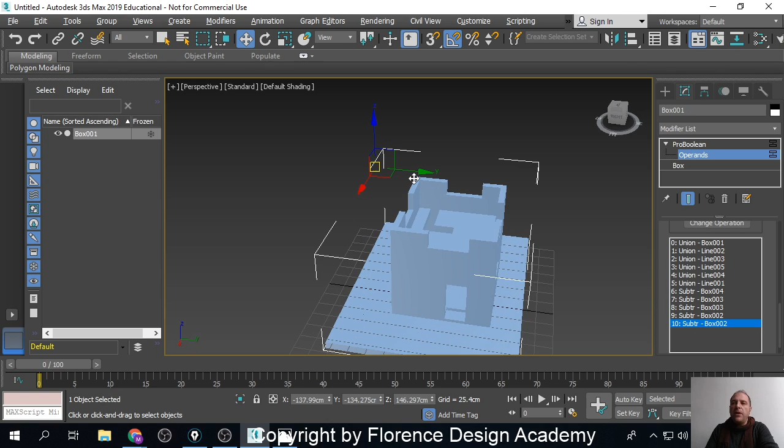Last but not least, if I move the box up and left, I will make the floor plan of my ground floor. And if I keep moving this big box up, I will also have the floor plan of my upper floor. I can make weird combinations, like seeing part of my section and part of my floor plan, and easily create and manipulate exploded views of any object.

Okay, so this is it for ProBoolean. If you have one quick question, like your classmate said, I had an issue with loft, can you please help? Yes, but tell me which issue it is and I can help. Try to explain it, and in these last few seconds I will help you.

I'm waiting... waiting. Hi Marco. Yes, Nicole, just in time.

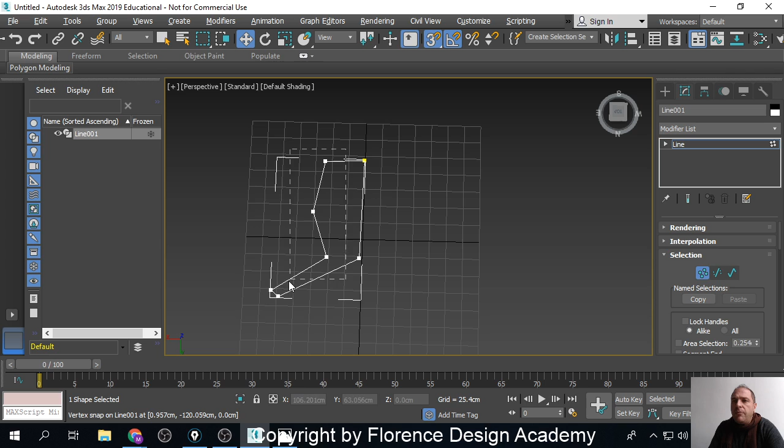The head of the octopus was this: you make 1, 2, 3, 4, 5. So you select all of your vertices, make them smooth, and by moving the pivot here, you start by using lathe, and this was the beginning part.

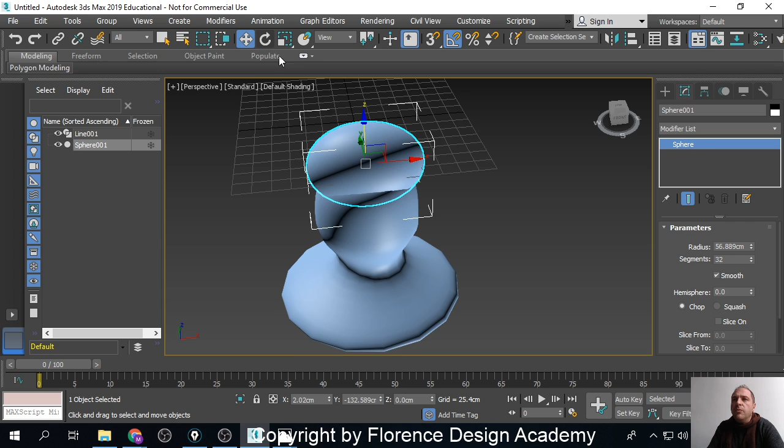But then, if you notice, the back of the octopus was like this. This part here that looks so complex is in reality just a sphere that is scaled, and you move it here, and it looks like one continuous object, but in reality they are two different objects. One is lathe and the other part is just a sphere, and this is the octopus.

Naomi and Yamini, it would be a lot better if you take a screenshot or a picture of the screen with your phone, and then send me the picture of the error by mail, because I have no idea which kind of issue you may have. You can't show the screenshot here, just send me by mail and I will answer by mail. It's okay, it's not a problem.

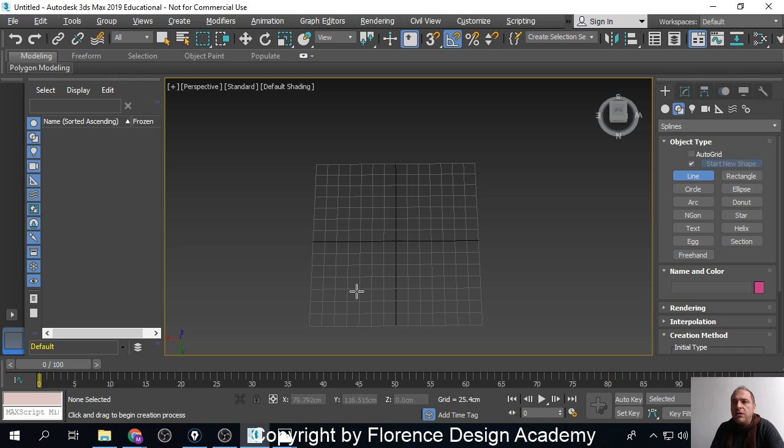I mean, the end of the octopus. The octopus has no hands, it has tentacles, and they are like these. And then I have to leave. No, too many questions, and it's just the circle. Look, these are tentacles.

You make a loft in this way, and then I have to leave because there is going to be another lesson here. So you make these, there is the path, you use loft, you use get shape, get these, but then in the modify tab you just use scale and move the end here.

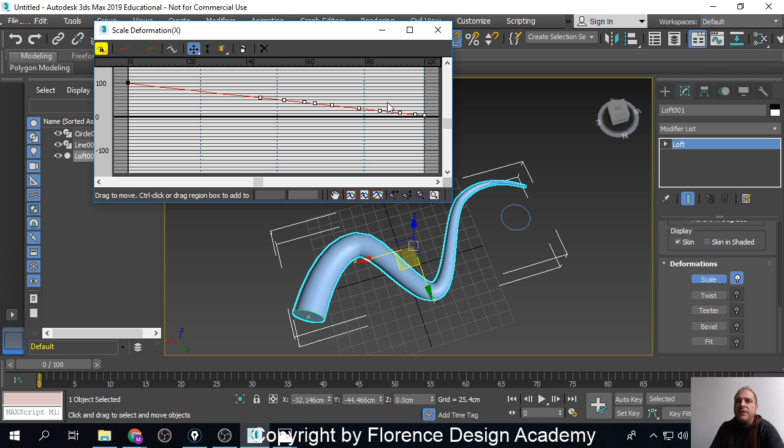By decreasing the scale, the loft becomes a point. And while we're here, look, so we also see the worm head. When we have more points, remember you can select all of your scaling points, right click and make them smooth or Bezier corner. I will make them smooth, and in this way, I can move these, I can move that.

But this one, that is the beginning, look, if I zoom in, this one at the beginning, if you have made it smooth, is also the handle. So you move the handle like this, boom, magically the head of the worm becomes also round. This was how to make the head round.